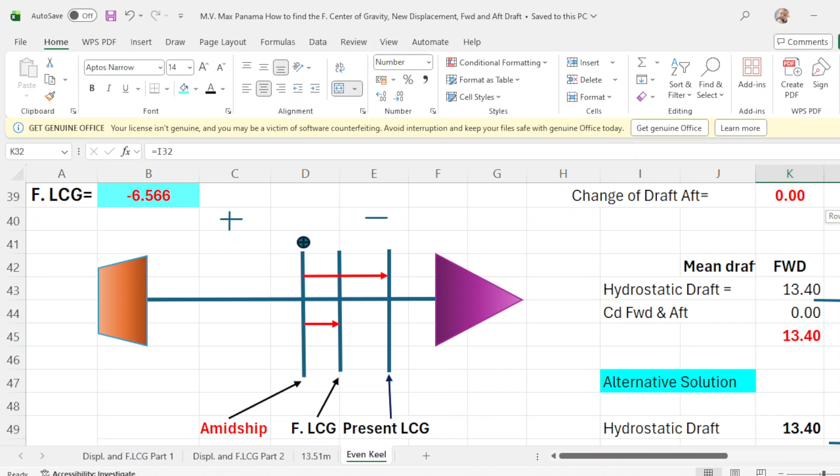So the LCG is forward of midship. When you say negative, it is forward of midship, and number 3 is also forward of midship, and number 5 is aft of midship, and number 7 is aft of midship. When you say aft and forward of midship, this is your midship. Since it is negative, it is forward of your midship. When the sign of the LCG is negative, like this one, it is forward of midship.

But when it is aft of midship, that is positive, which is this one. So positive, that is number 5 and number 7. Number 5 should be around here, and number 7 will be here. Hold number 1 will be here, hold number 3 will be here. So that's why it's negative. And number 5 is positive because it's aft of your midship, and number 7 is somewhere around here, which is also positive. I hope you will take note of the signs.

Okay, so what we do, we use the form like in the trim and stability form. Your initial displacement is 30,582, and its LCG is negative 9.54, which is this one. Hold number 1 is 8,000. The LCG is negative 86.97, in the forward part, that's why it's negative. Number 3 is 10,500, and its LCG is negative 36.560. Number 5, LCG is positive 14.85. And hold number 7, the LCG is 66.32.

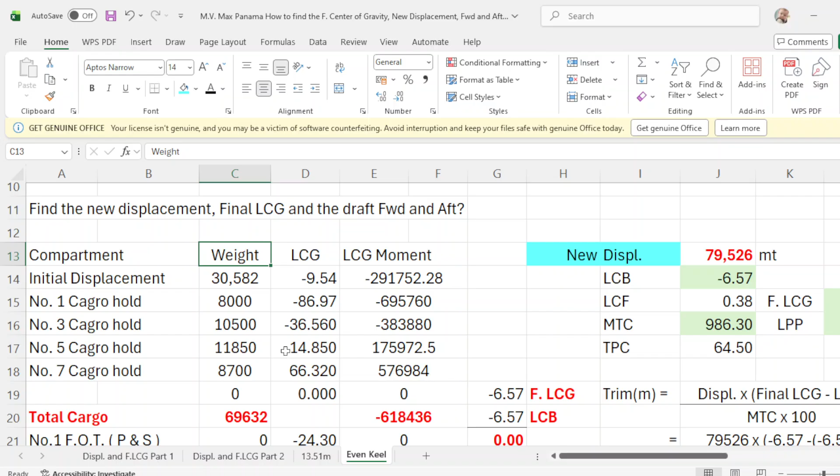Multiply the weight. Okay, this should be the weight. Put it like this. Weight. That is the weight. The weight multiplied with your LCG, that will be this figure. 8,000 multiplied with this figure, that will be this one. 10,500 multiplied with your LCG, and this will be the figure, and so forth. And the total cargo weight will be 69,632, and total LCG moment is negative 618,436. Okay?

Continue. We have no FO, 0. Your DO is 0. Fresh water is 0. And your constant is 280 multiplied by the LCG. This will be your LCG moment. Total deadweight will be 69,912. This is the total moment, so deadweight plus your lightship. This is the LCG. Total displacement or new displacement is 79,526. This is total LCG moment, and your LCG is negative 6.57.

New final LCG. How did I get this one? It is your LCG moment, which is this one, divided by your new displacement, which is this one. So LCG moment is negative 522,166 over new displacement, which is 79,526, and your final LCG is negative 6.56. Take note of this displacement, 79,526.

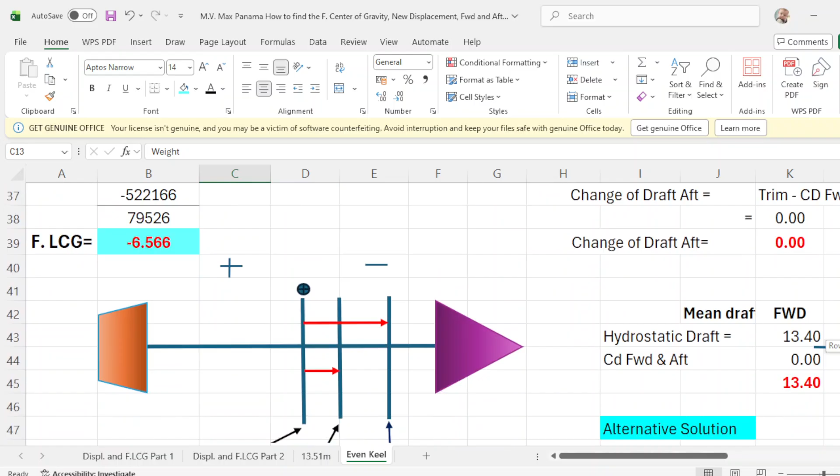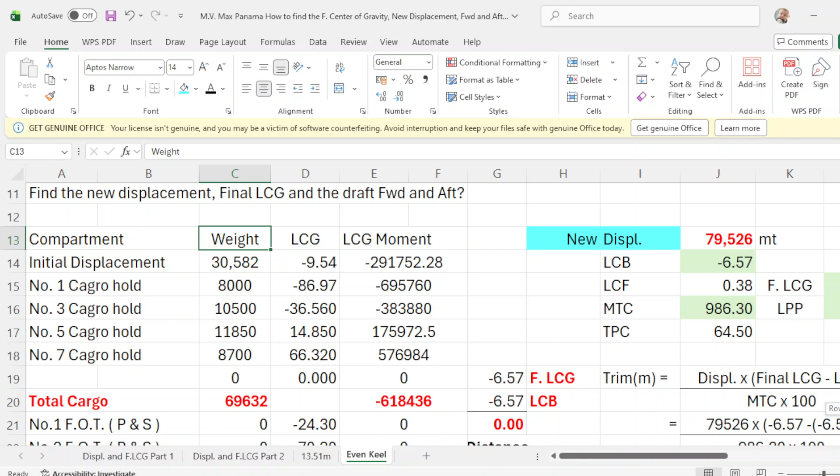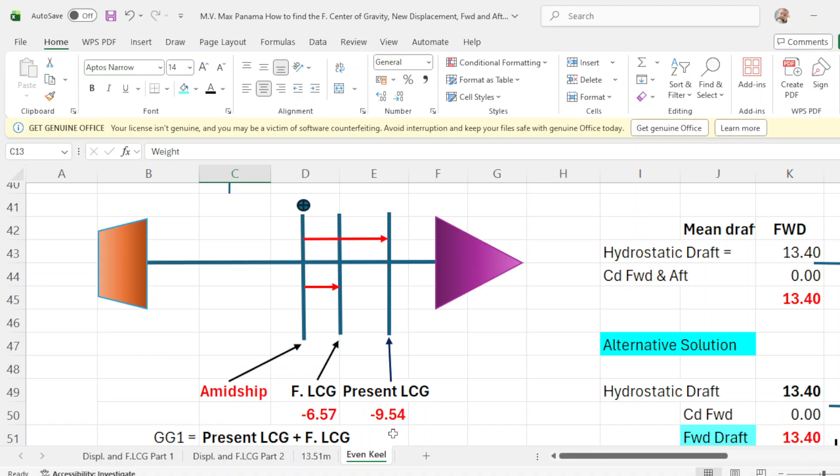Okay, before we get that, your present LCG is negative 9.54, which is this one, because this is your initial 30,582, and your initial LCG is negative 9.54. So from midship, you measure 9.54. This will be the vertical line of your present LCG.

Now your final LCG is negative 6.57. That will be this vertical line from midship going to 6.57. This will be your final LCG. This is your midship. And the distance between present LCG to final LCG is 2.97. That is what you call GG1. So from initial G to G1, that will be 2.97.

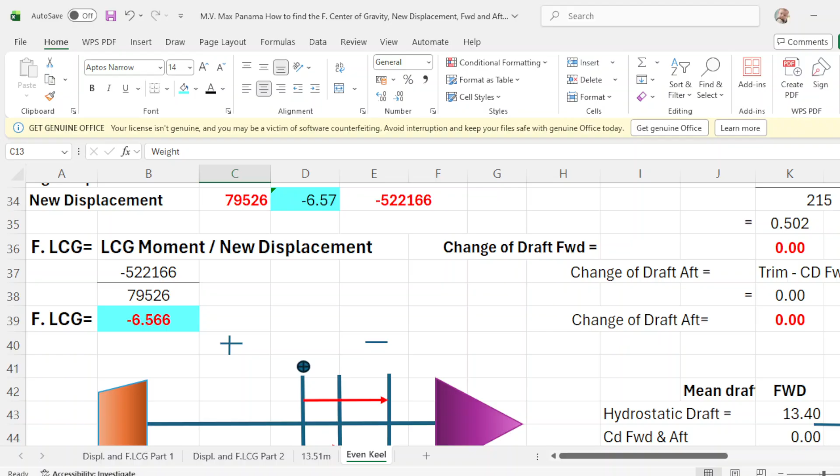Now, take note of this displacement of 79,526. So 79,526 is 13.40. We'll check. Put here 79,526. That will be 13.4.

13.4 meters. What will be its LCB? LCB is negative 6.57. LCF is 0.38. MTC is 986.3. And your TPC is 64.5.

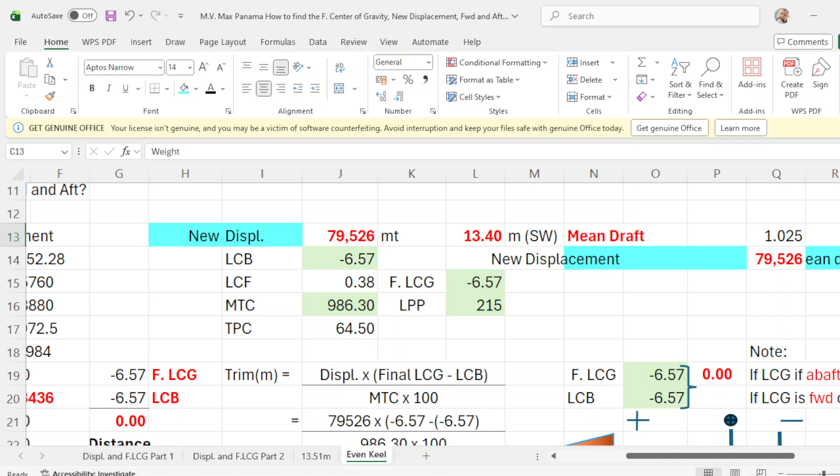TPC is 64.5. And your final LCG is 6.57, which is this one. And your LBP is 215. How do you get 215?

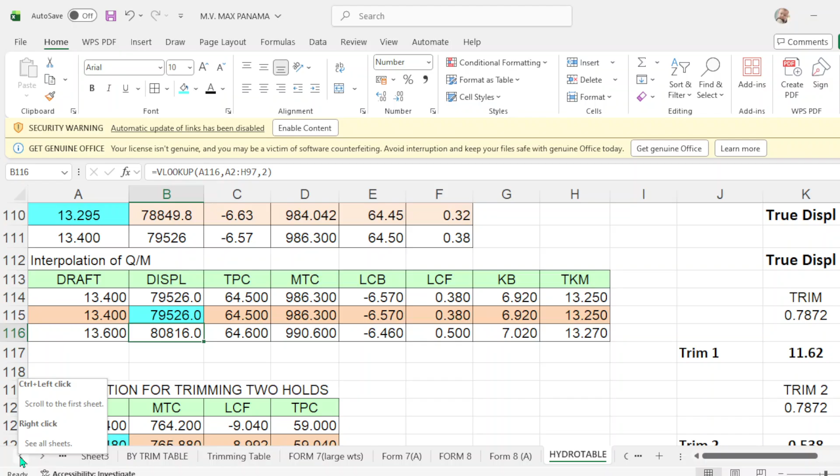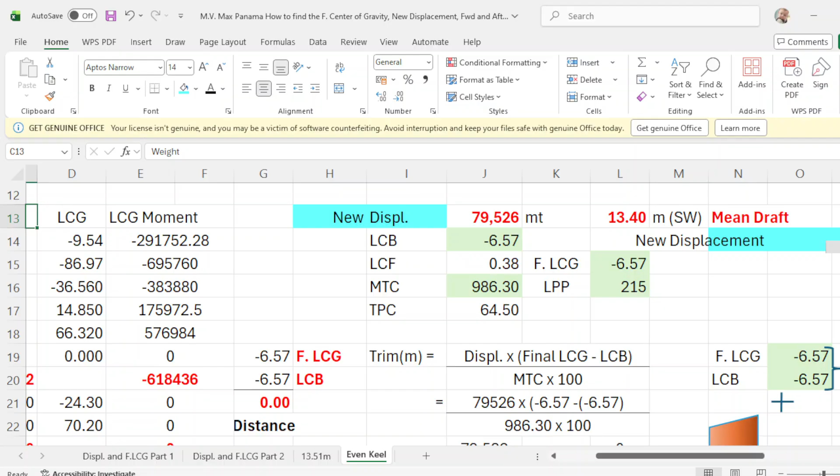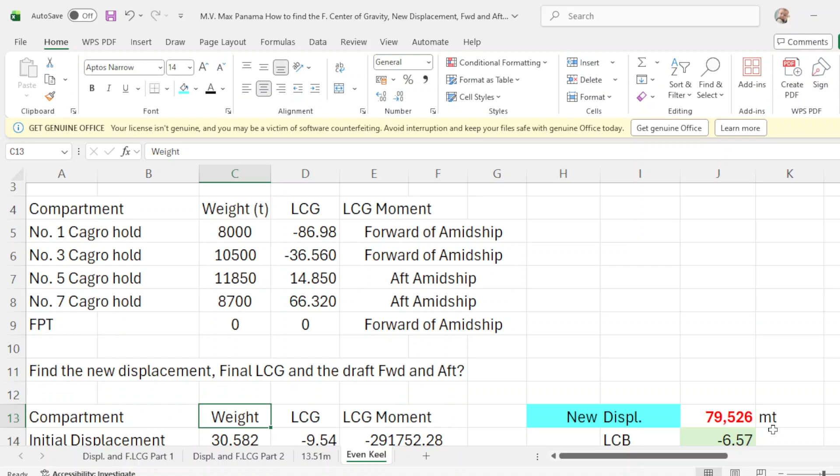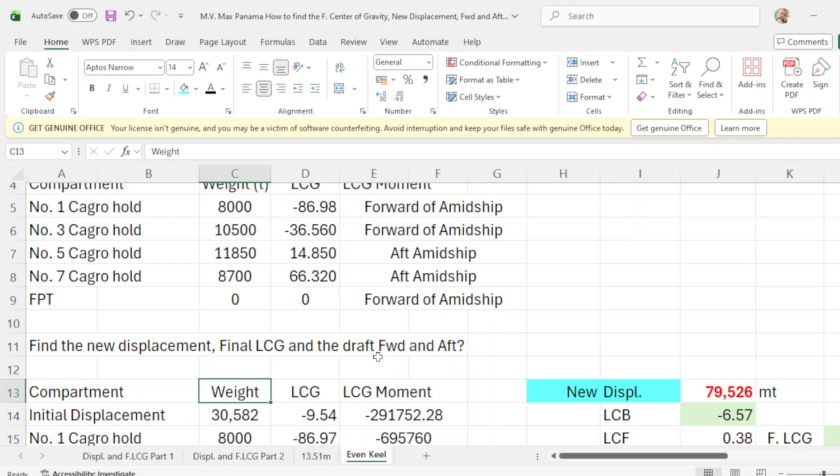LPP is 215, so 15. Since we already have the mean draft, we are now going to compute for the forward draft and aft draft. The new displacement is now 79526 and the final LCG is negative 6.57. The next will be to find for the forward and aft draft.

First, we have to get the trim. The formula for getting the trim is displacement times final LCG minus LCB. So our displacement is 79526. Our final LCG is negative 6.57 minus, LCB is negative 6.57. Take note that the final LCG and final LCB are the same, that's why it is 0.

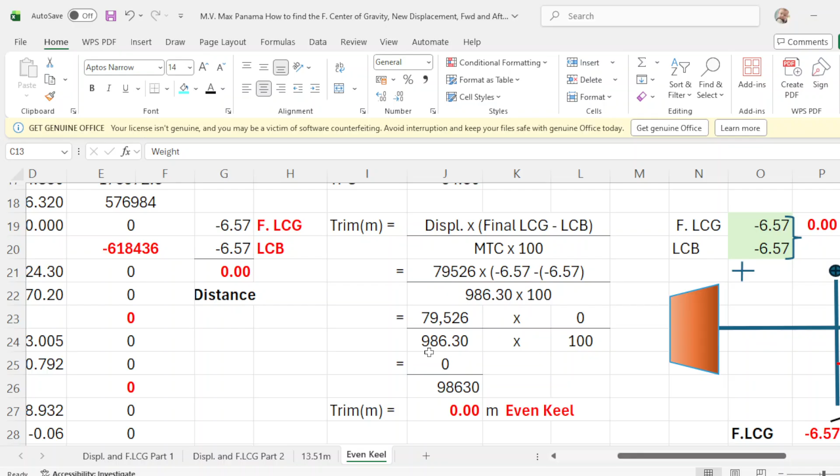And your MTC is 986.3 times 100. So: 6.57 final LCG minus your LCB is 0, and your displacement is 79526, and your MTC is 986.3 times 100, according to the formula. Multiply this one, that will be 0. Multiply 986.3 times 100, that will be this one. You divide this one, then your trim will be 0.

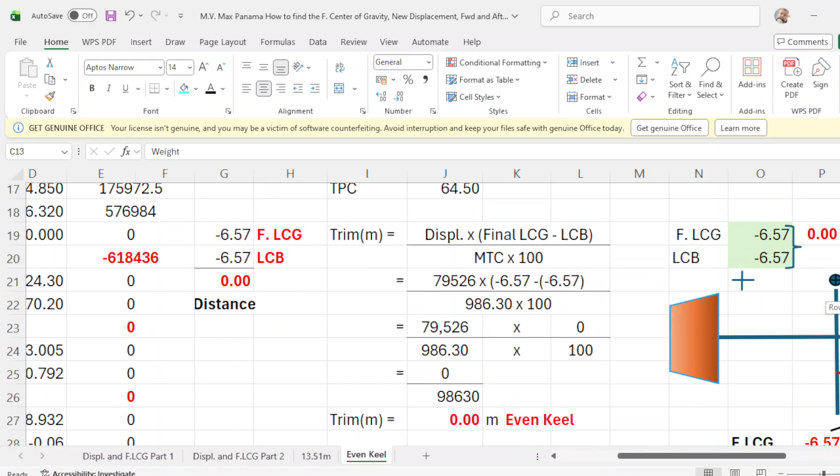Meaning even keel. Why even keel? Because your final LCG is the same as the LCB. Now how am I going to prove it? Take note of this: on an even vessel or even keel, the role of the longitudinal center of gravity (LCG) and the longitudinal center of buoyancy (LCB) is that they must be in a vertical line.

So your LCG, center of gravity, and your center of buoyancy or LCB should be in a vertical line. That's why it is even keel. So your final LCG and your LCB, if they are in a vertical line, that means they are even keel. So by equation, this is how it looks like. That's why your distance is 0. That's why it's even keel, the trim is 0 because it is even keel.

Now, from getting the trim, we will compute for the change of draft forward. The formula is 1/2 LPP plus LCF over LPP. Your LPP is 215. 1/2 of LPP is 107.5, and LCF is 0.38.

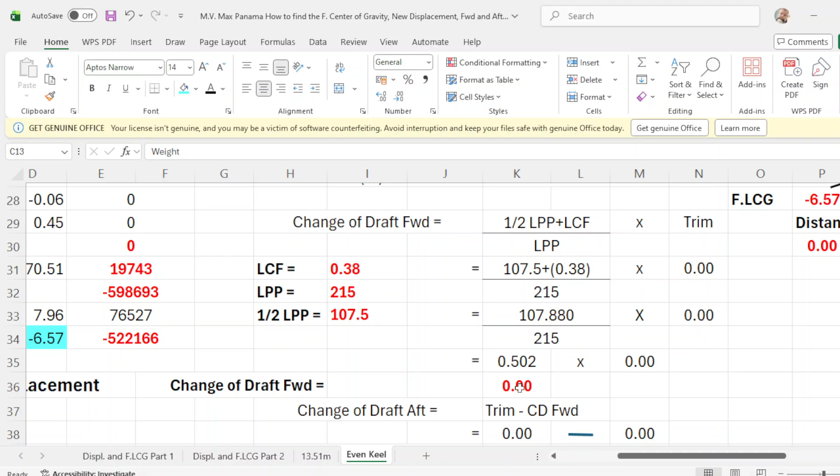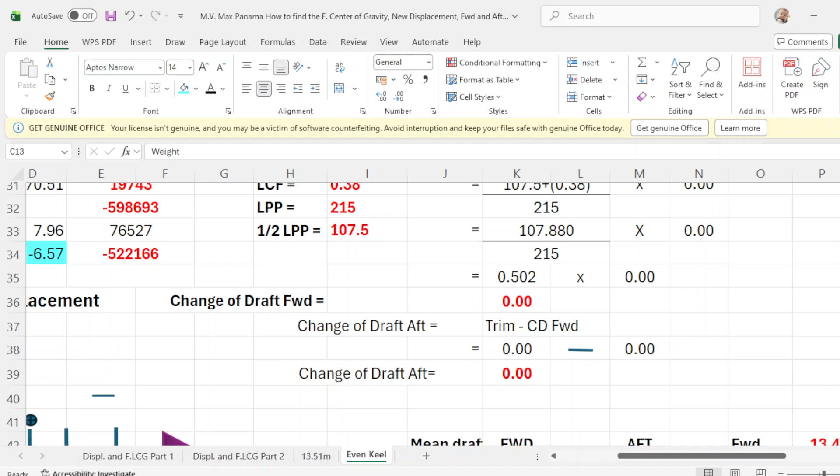So to get the change of draft aft, it is trim minus change of draft forward. Your trim is 0, change of draft forward is 0, then change of draft aft is 0. Then we go to this equation now.

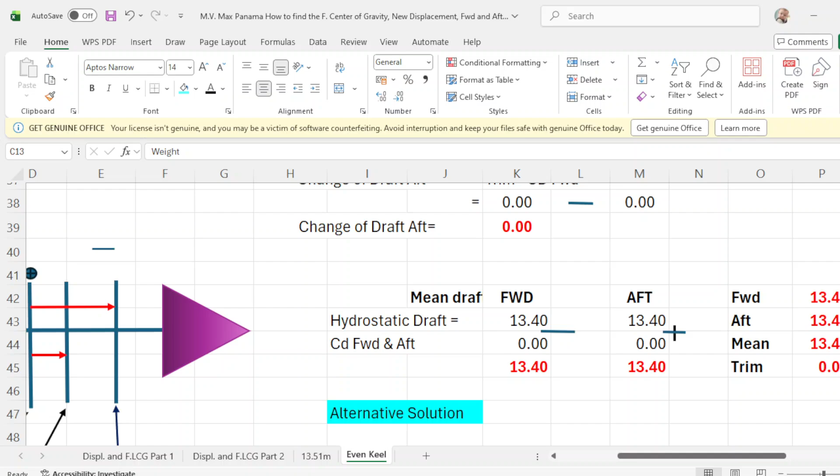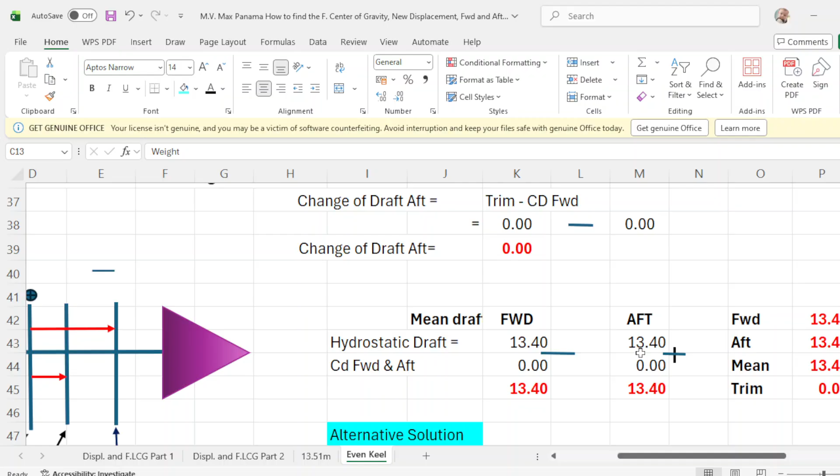By hydrostatic table, your mean draft is 13.40, which is this one. With your new displacement, the mean draft is 13.40 of salt water. That will be forward and aft. Since your change of draft forward is 0...

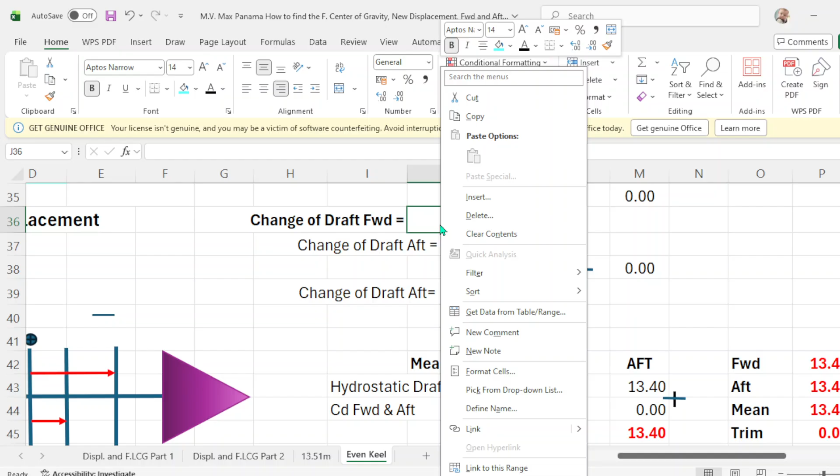Cut this one here, paste... okay, cut... paste. So your change of draft forward is 0 here, and your change of draft aft is 0.

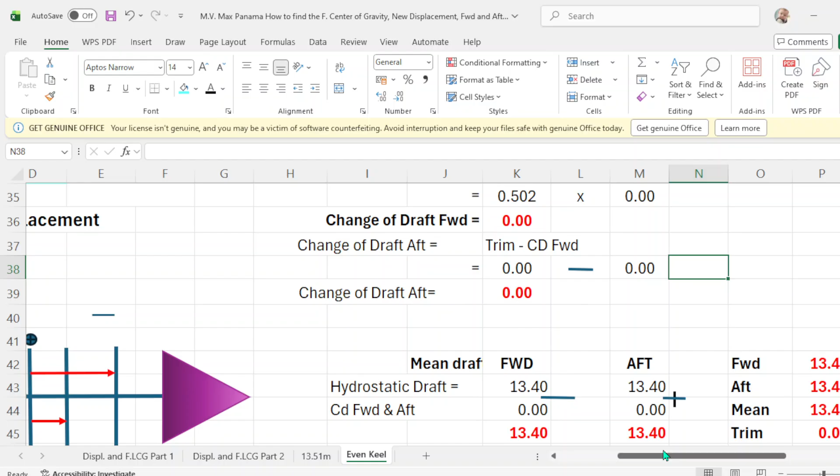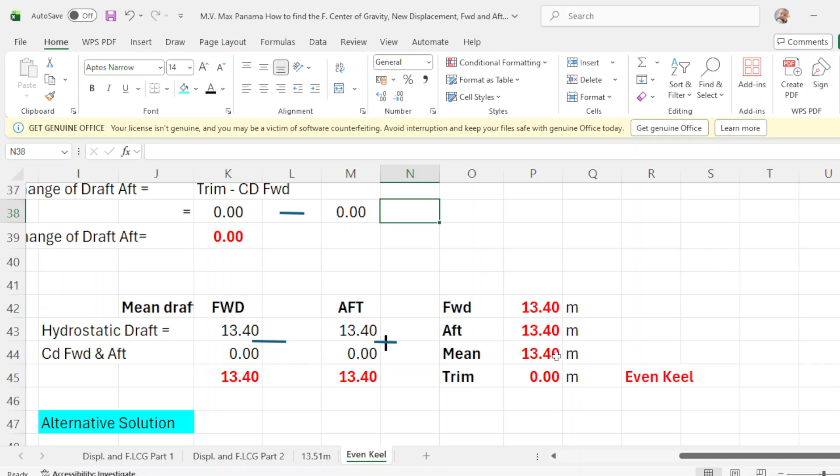So your final draft forward is 13.40 and aft draft is 13.40. So your mean is 13.40, your trim is 0. Now there's another solution: your mean draft is 13.40 minus your change of draft forward, which is 0, then your forward draft is 13.40; plus your trim, which is 0, then your aft draft is 13.40.

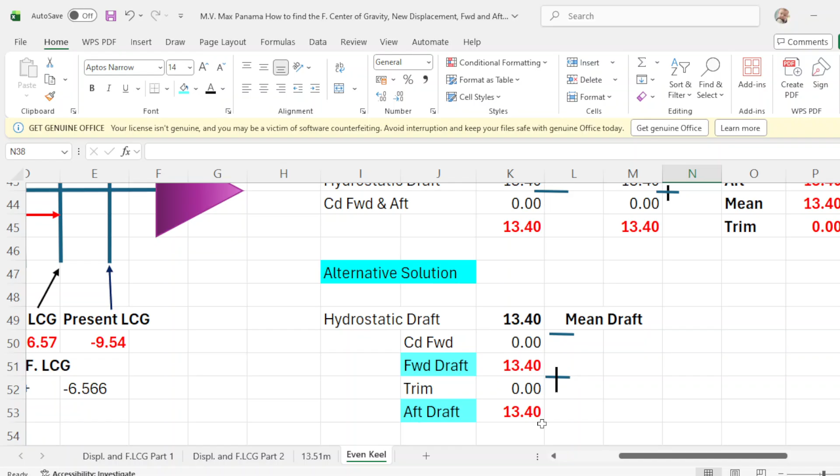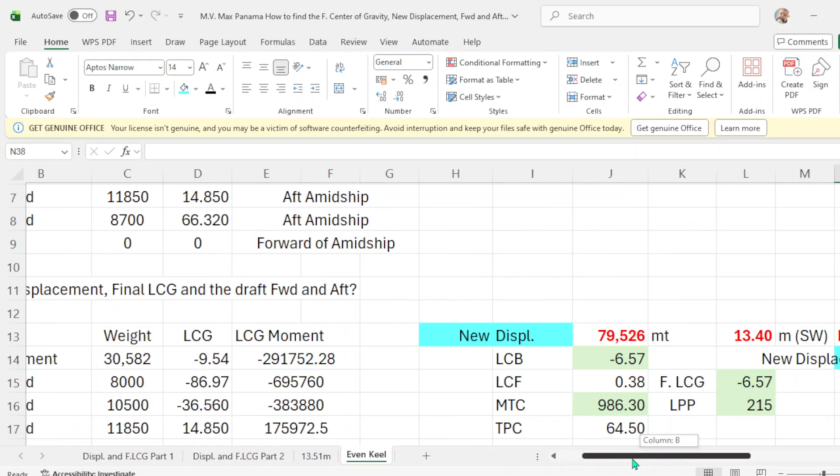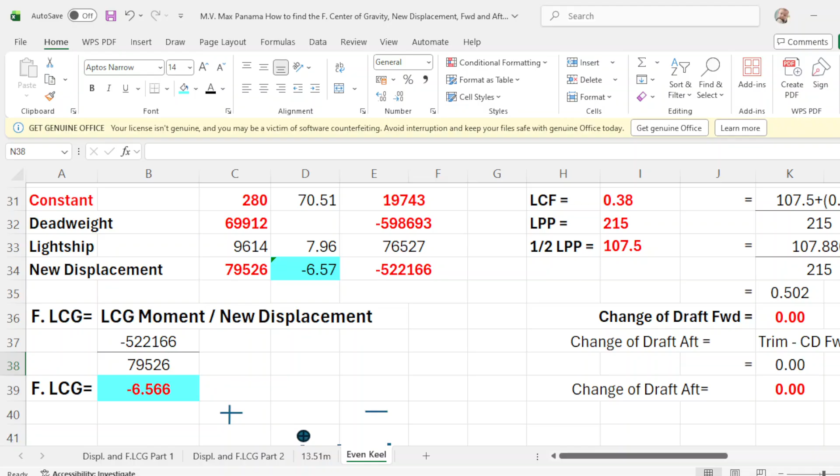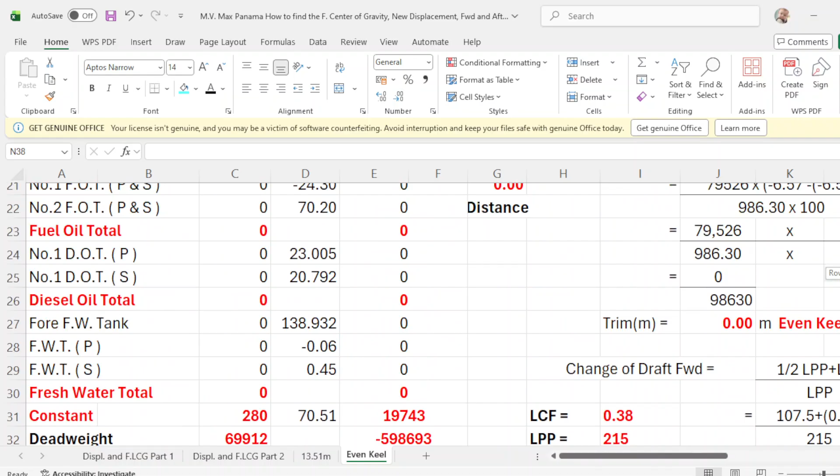Now we have already answered the question of the new displacement, which is this one: new displacement of 79526, with a draft of 13.40, and the final LCG is this one, negative 6.57 or negative 6.566. We have already the final LCG, and the forward and aft draft is even keel at 13.40.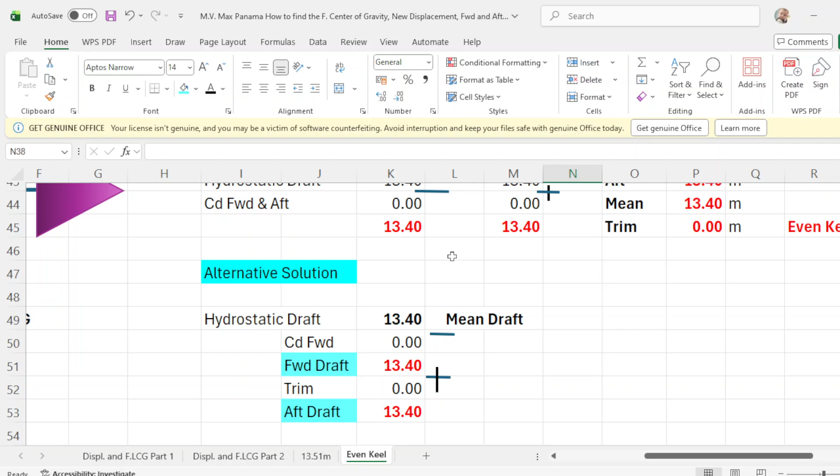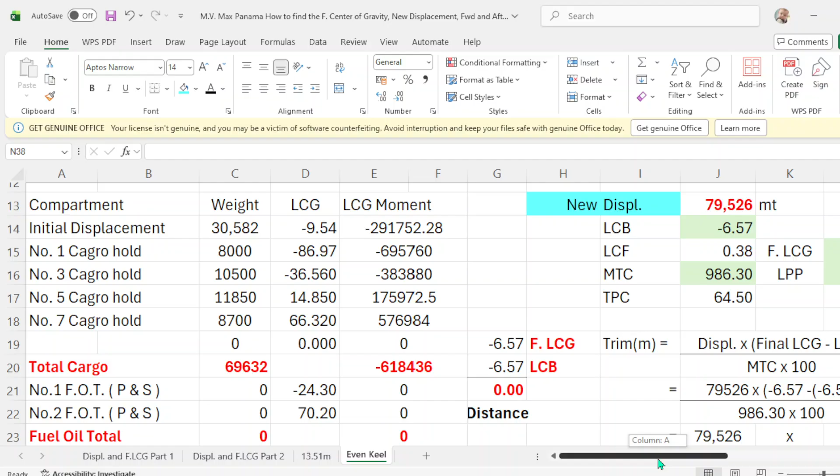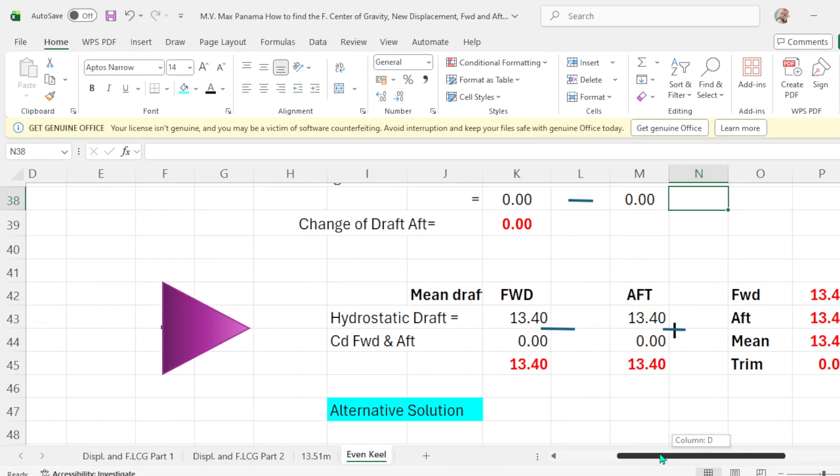So this is the equation or solution when you load in cargo holds 1, 3, 5, and 7, with your initial displacement of 30,582, and the LCG is negative 9.54. But I have another equation or formula to prove that we can come up to this final draft of 13.40, even keel, forward and aft. So I'll show you guys the other process, which is this one.

This is form number 6: how to find trim when handling several moderate weights. Your initial draft is 5.48, which is this one.

Okay, 5.48 even keel. So you put here 5.48. Okay, so you put here 5.48 forward, aft is 5.48. And your mean will be 5.48.

So you will take your actual draft, mid port, that will be, for example, 5.48. And your starboard mid is also 5.48. Okay.

So your mean draft, actual mid draft is 5.48. And your final draft is 13.40. Okay, so you put here 13.40. Okay, when you press this one, your sinkage will be 7.92. The vessel has to sink about 7 meters and 92 centimeters to reach 13.40.

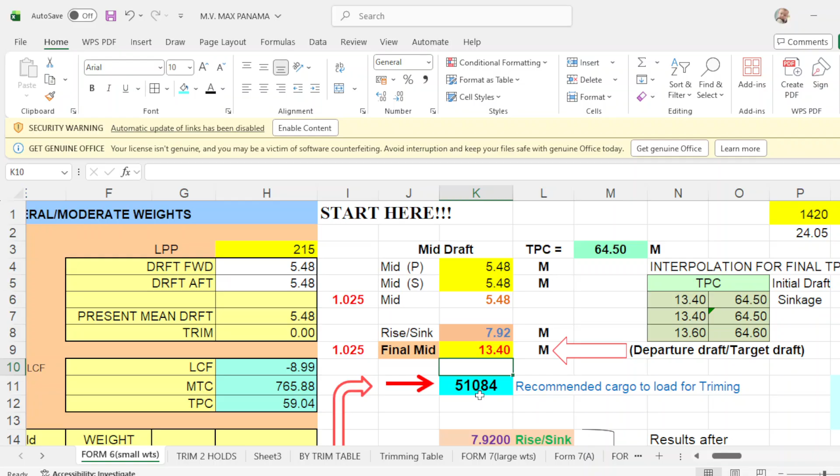Now the recommended cargo to load is 51,084. Now what happens if you load this amount? So you put here 51084. That is the cargo that you're going to load in your vessel, total cargo.

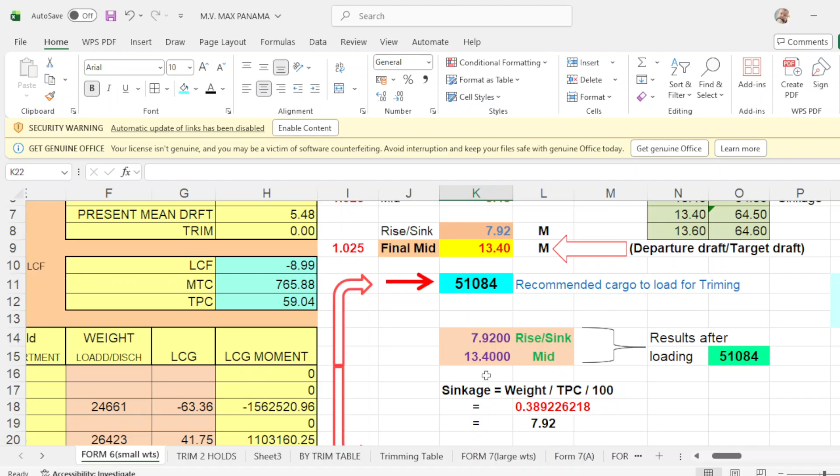So when you load, what happens if you load 51084? Your mid draft is exactly the same with your final mid draft, and your sinkage is exactly the same with your sinkage of 7.92. So it is confirmed that with this figure, you are going to reach this 13.40, your final draft.

Okay, now we go to trim holds 2. So we go to trim holds 2. Now, guys, I want you to take note that the remaining program is trimming with 2 holds. And the remaining cargo to load is 51084, which is the same, 51084.

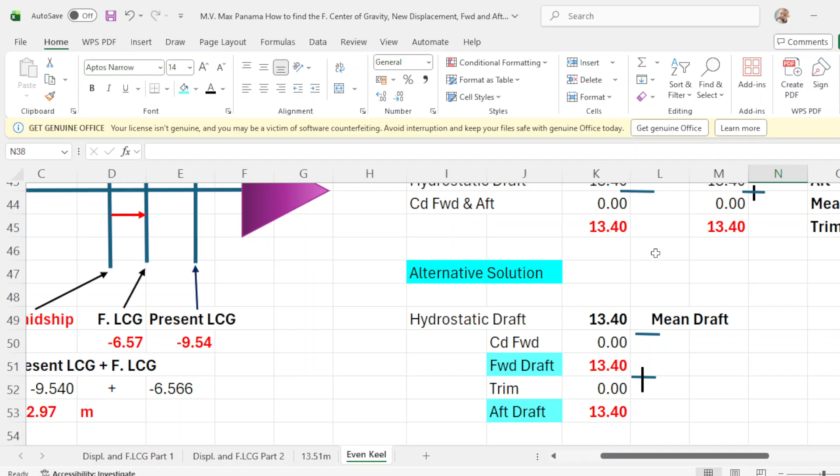But in this case, guys, you are trimming 2 holds. So I trim for 2 and 6. But in the program, in the other one, you're going to load in 1, 3, 5, 7. Okay, but in this case, we're just going to prove if we load in 2 and number 6, we will still get the final draft of 13.40 even keel. Okay, so this time, let's say we're going to load in 2 and number 6 hold with the same cargo. Okay, so I put here 2 and I put here 6.

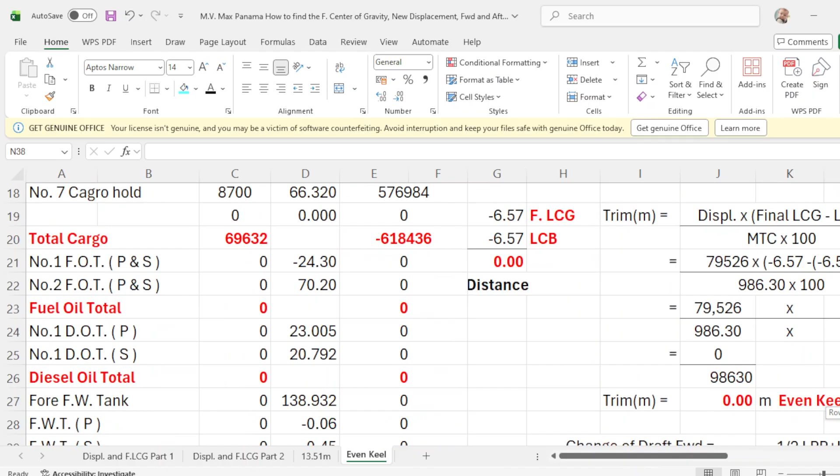Okay, instead of using one, two, three, four holds, I'm going to use here only 2 holds. This is just to prove that you will get the departure draft of 13.40.

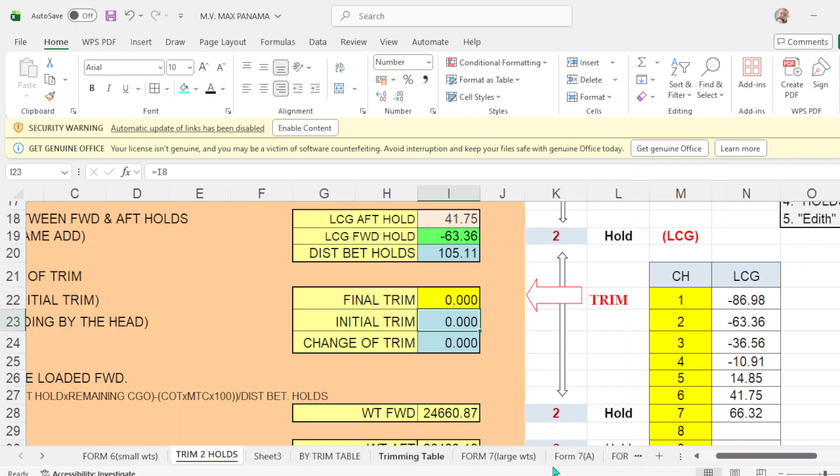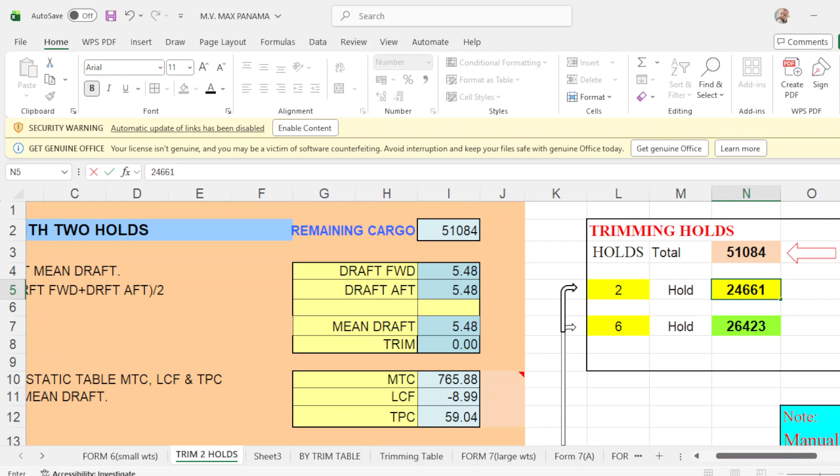Okay, you get your 2 and 6, and let's say even keel, no trim, and the recommended cargo to load for number 2 is 24661. Okay, 24661, so I put here 24661, and number 6 will be 26423.

26423. Okay, and your final draft would be 13.40 forward, and aft draft is 13.40 aft, 0 trim, and your mean is 13.40. And here your deflection is 0. Okay, your bending moments and shearing force, or deflection, is 0 here.

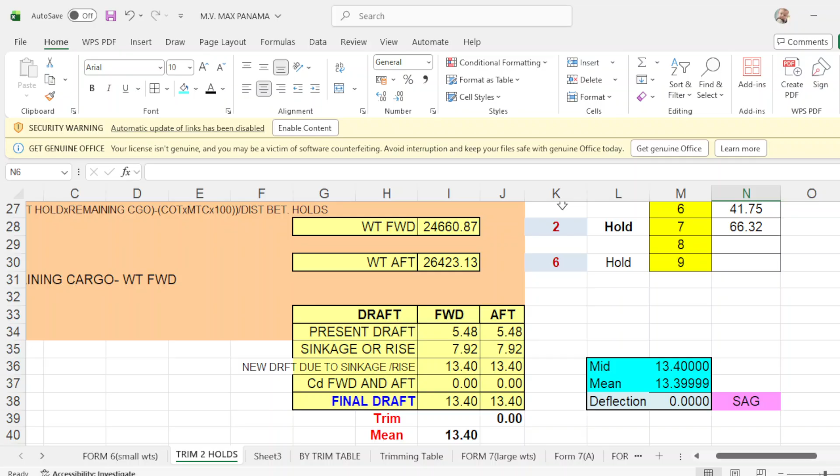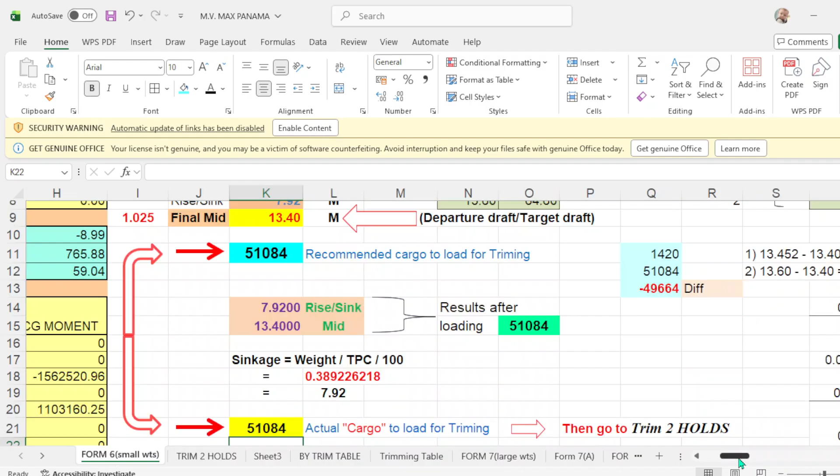Okay, so let's go back to this, so this is another program, guys, of trimming with 2 holds. Then we go to form number 6 from the start, which is how to find trim when handling several moderate weights.

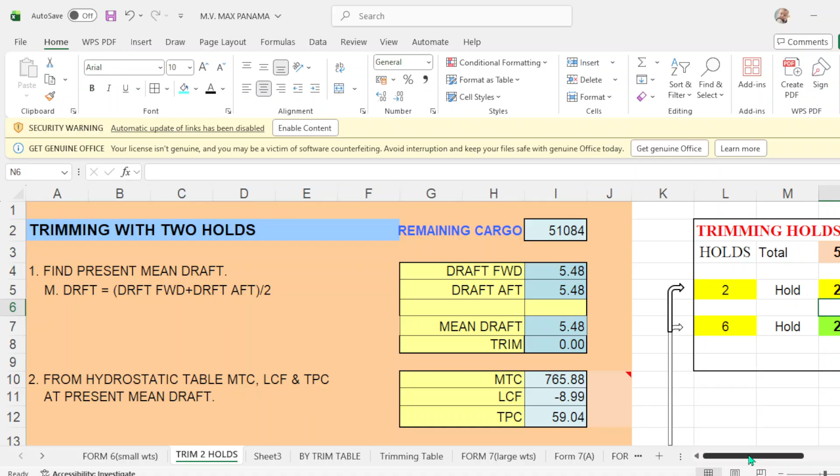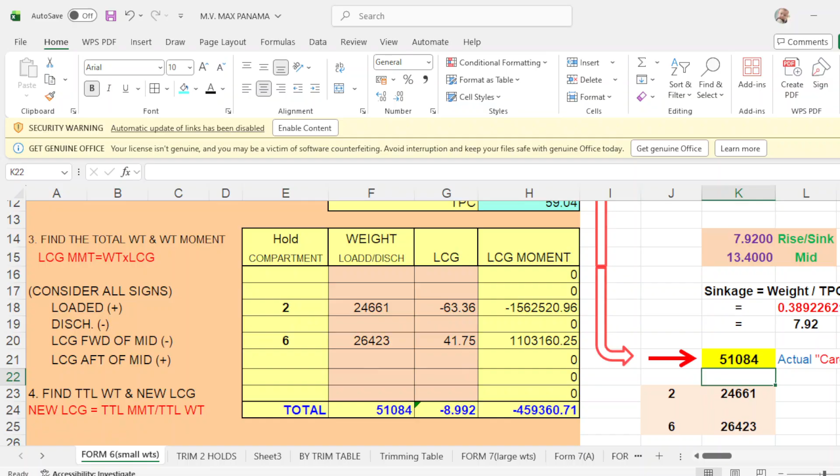Okay, since you recommended, as recommended in hold number 2 is 24661 according to this figure here, and number 6 is 26423. So in number 2 you put here 24661, you have your LCG, and number 6 is 26423, you have your LCG, and your final draft would be forward is 13.40, aft draft is 13.40, you have 0 trim, and your mean draft is 13.40, and you have here deflection is 0.

Okay, this is the second program, and your last program to prove that you still have the same figures. So take note, the recommended cargo to load is 51084, which is 51084. Okay, and your initial draft forward is 5.48, aft draft is 5.48, which is this one.

Okay, and your trimming, go to your trimming table for your correction. So if you're in hold number 2, your forward and aft correction, that will be forward is 4.8, aft is negative 1.7. This one, guys, we just choose 13 meters because 13.4 is close to 13 meters.

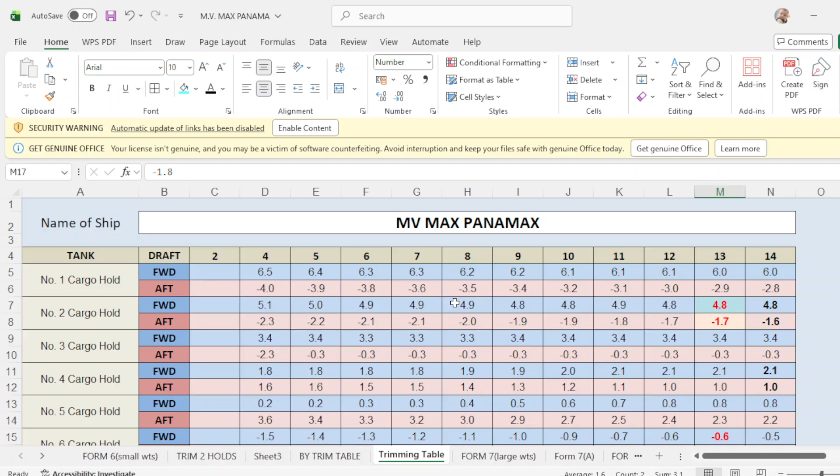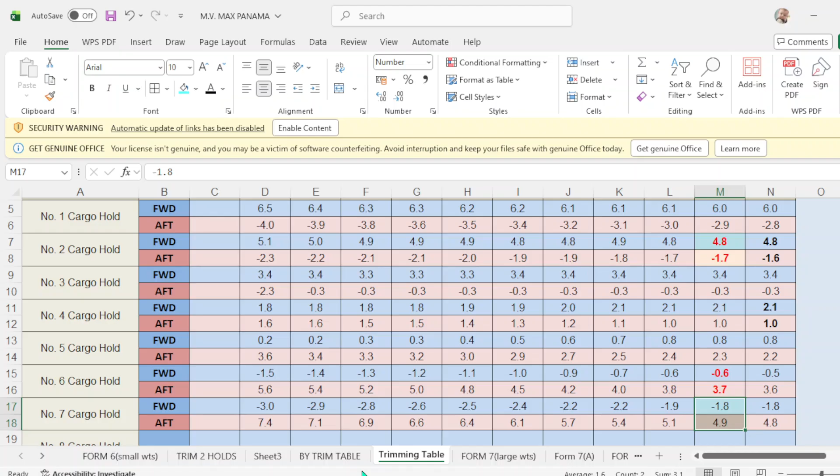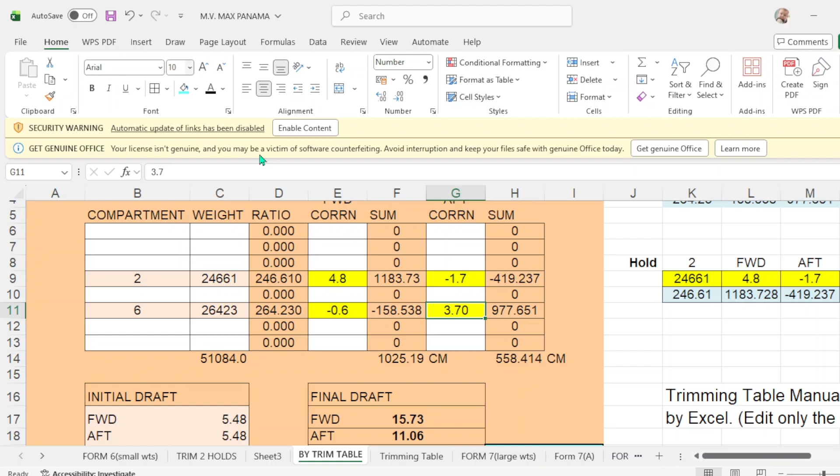Take note when I adjust the correction on number 6 from 3.7 to 4.58, take note that the draft aft is 13.4. So I will also adjust this one. Then adjust this one forward. No, it's 13.4. Again, I'll go back.

From 4.8, I will adjust it to 3.9. Now I will have an even keel of 13.40. See? And zero trim, the deflection is 0.

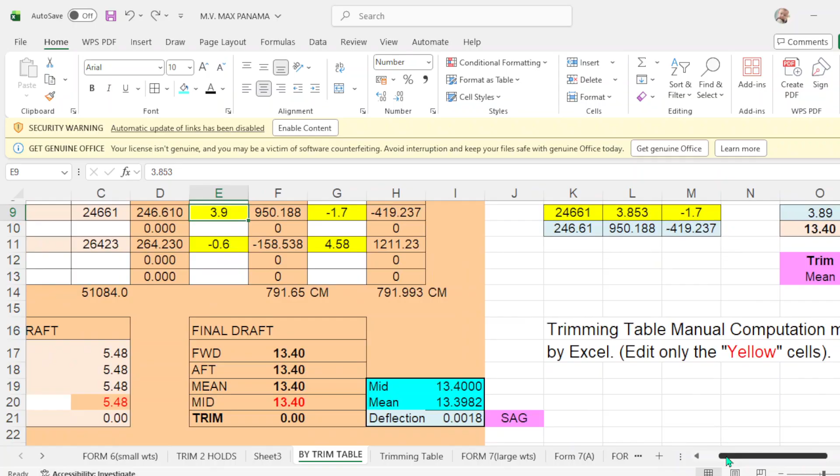Now, for example, the correction in number 6. To load in number 6, because you want to have a trim, first you load in number 6, the cargo to load is 26423, the correction forward is negative 0.6, and aft is 4.584, and number 2 is 24661, forward correction.

Number 2 is 39 or 3.853, and aft is negative 1.7.

Now, after loading, this is your initial draft. After loading this figure, your initial draft will be 3.89 and aft will be 17.59. The big trim.

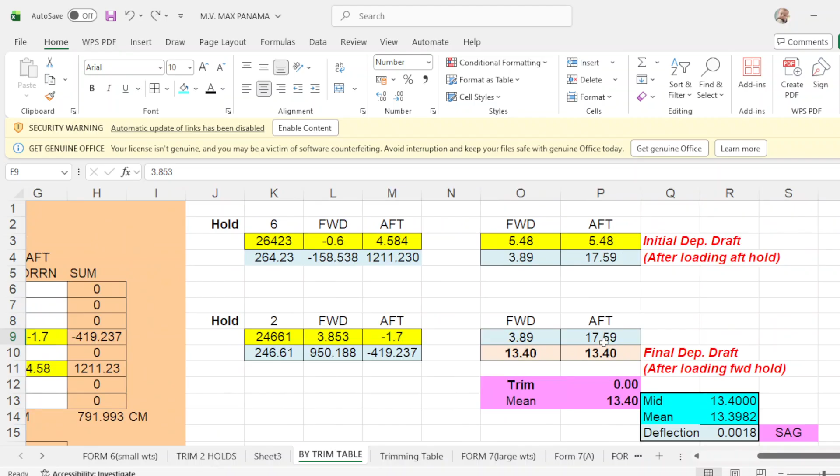Then you load in number 2. After loading this figure, then you will have even keel. Your trim is 0 and your mean draft is 13.40. Guys, you don't actually have a trim this big. This is just to show, to prove to you that the final draft we can reach is 13.40.

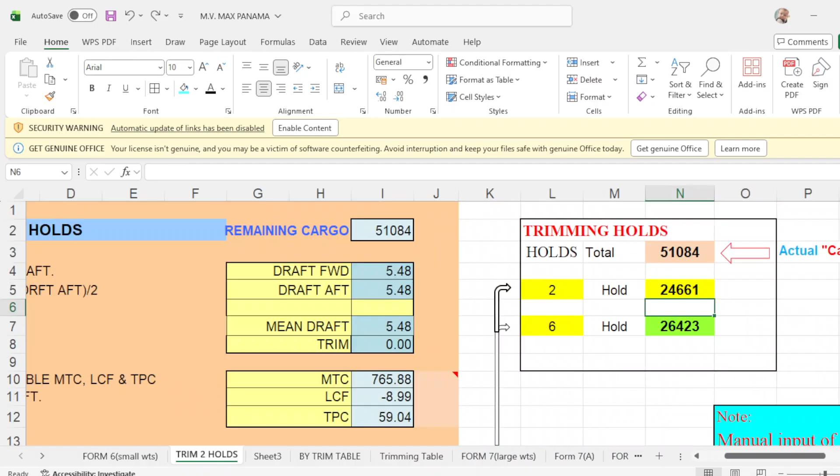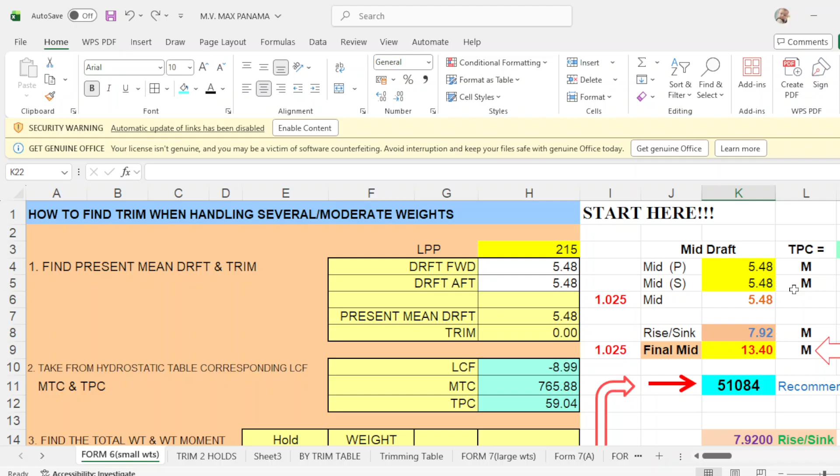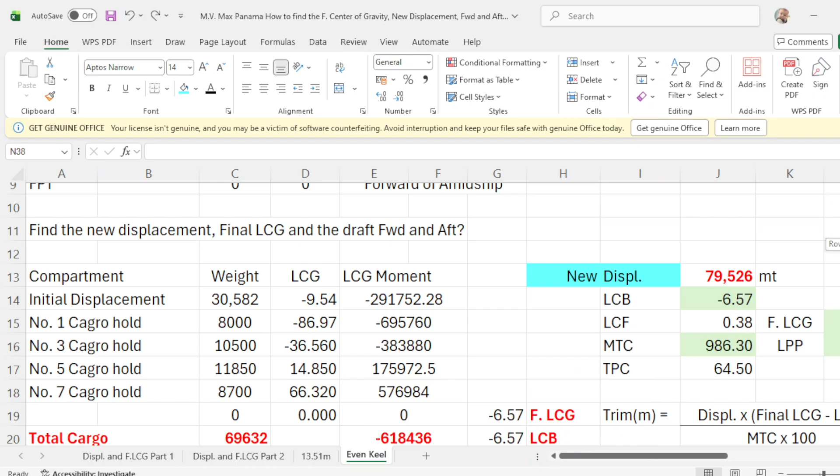With this one, with this figure, okay, you will reach the final draft of 13.40, and here 13.0, okay. But the original is when you load 1357, this amount of cargo, you will arrive at the draft of even keel, okay, of 13.40.

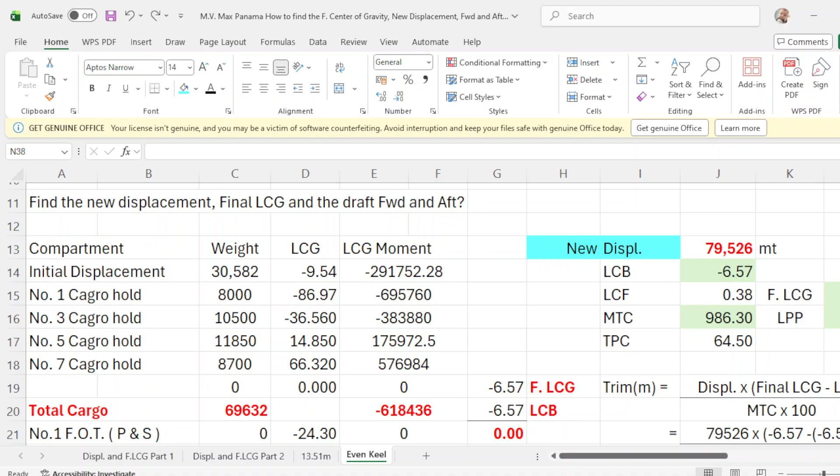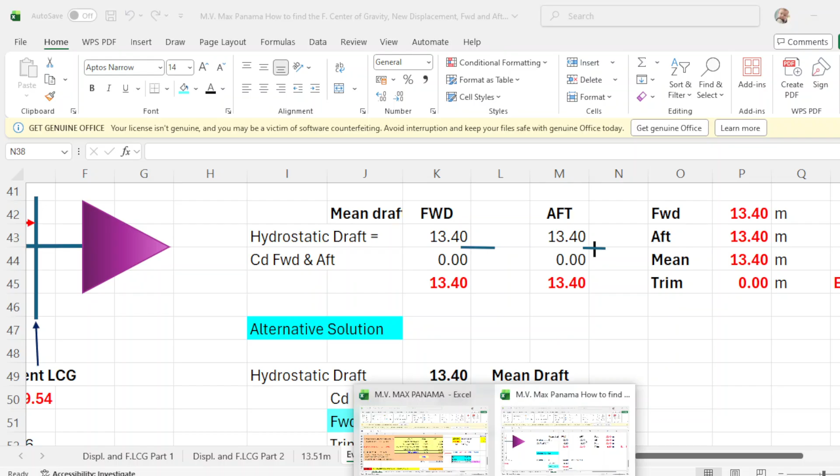So if you load these figures, 1357 with your initial displacement of 30,582 with a draft of 5.48, you will get even keel of 13.40, okay. These figures I show you only prove that you can reach the draft of 13.40. This is impossible if you load 24,000 and 26,000.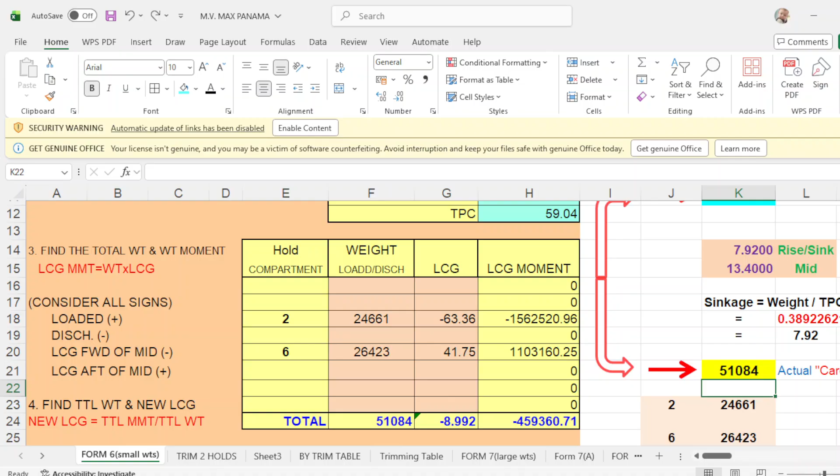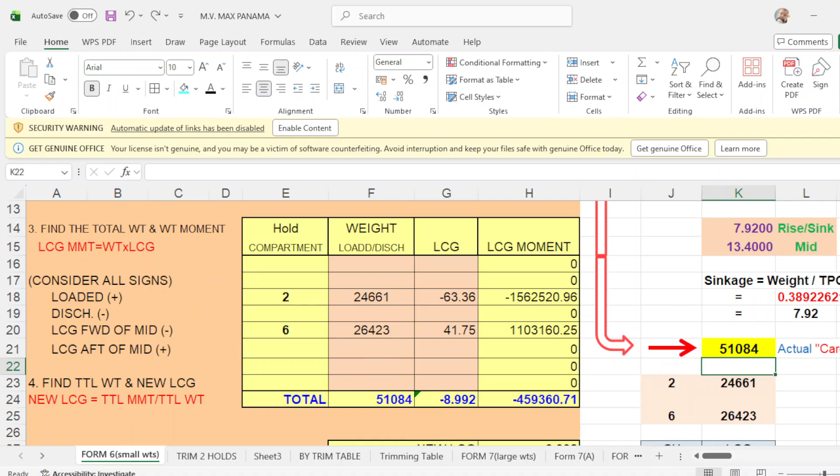Well, probably you can load this one at the same time. You load number 2 and number 6 at the same time together, then you will reach the final draft of 13.40. But never attempt to load in number 2 alone. Continue loading this one, then you will load number 6, because you will have a big trim. Take note of the big trim, guys.

Where is that? Trim, this one. This is impossible, guys, because look at that. The trim is 14 meters. That's impossible. Then you will load number 2 of this amount, then you will...

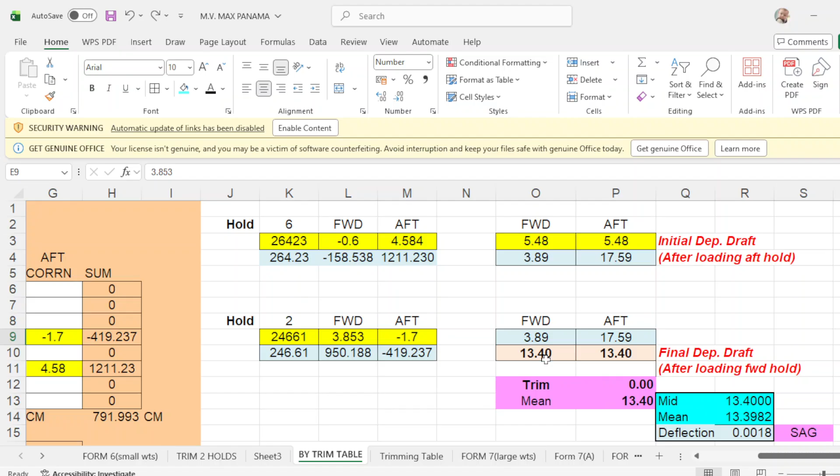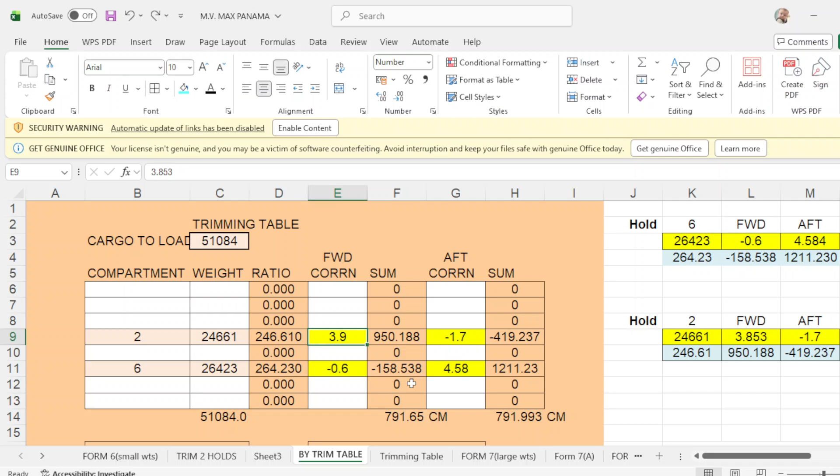The best thing to do is load number 2 and number 6 at the same time together so that you will come out with a draft of 13.40. Okay, this is just to prove that it's possible that we can reach 13.40 with this program.

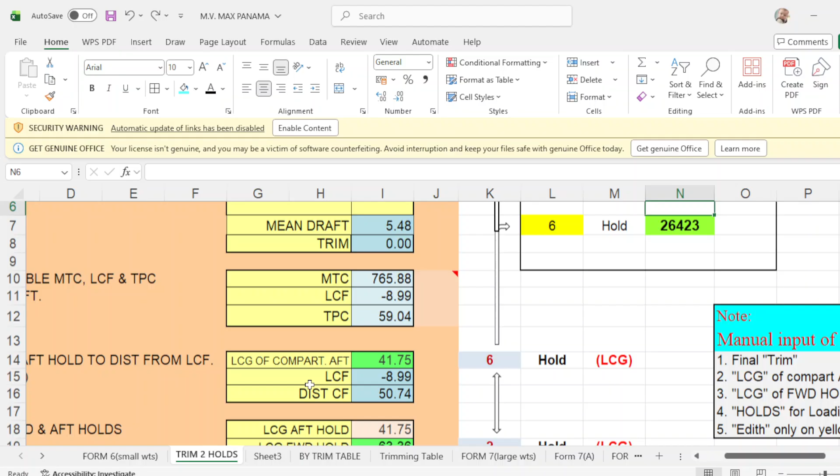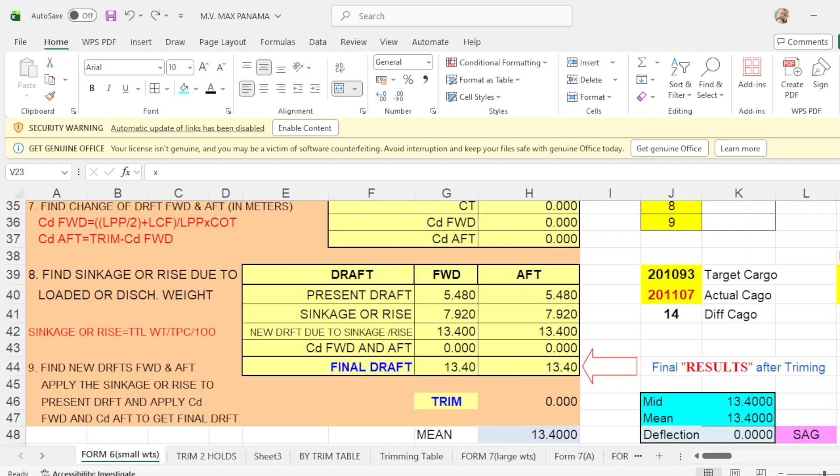We have here, I'm sorry, this is form 6, even keel 13.4, trim 2 holds 13.4 even keel, and by trim table we have 13.4 even keel. By manual computation you can do this one.

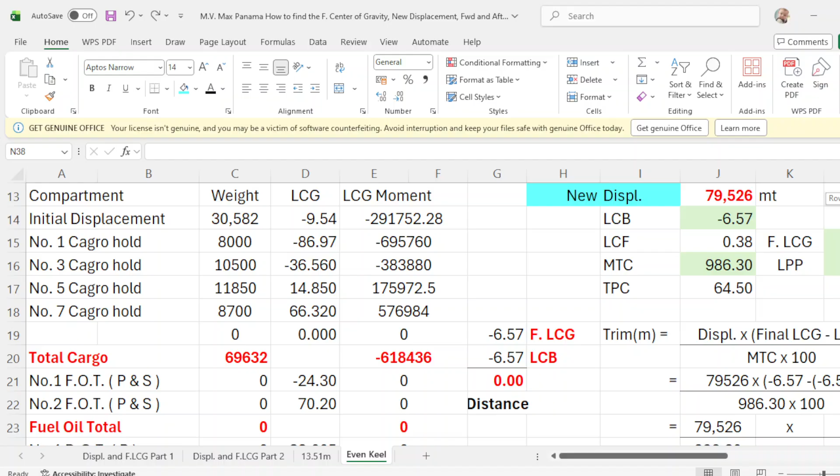And this is the same as your trim stability sheet.

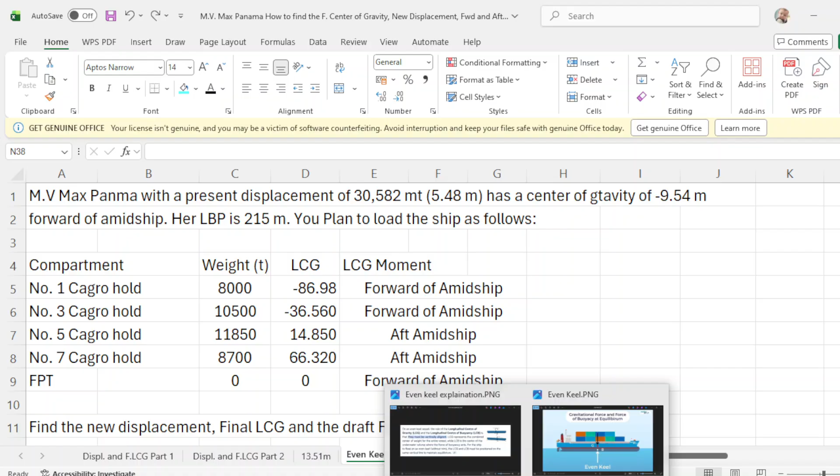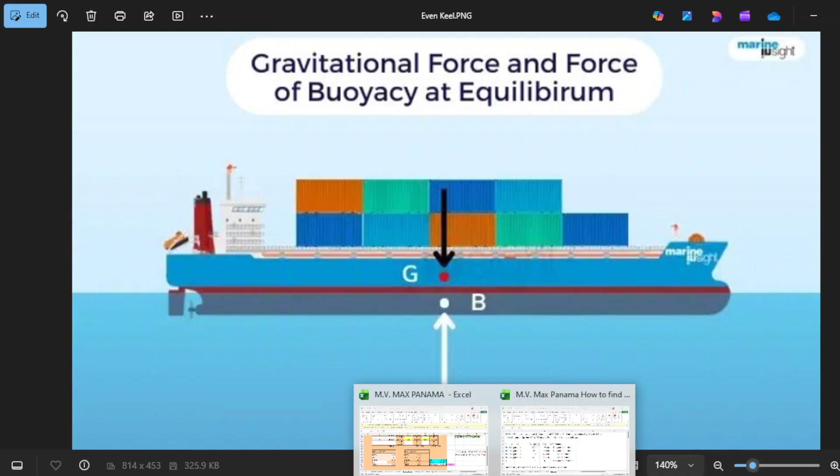So that's it, guys. By the way, I've already shown you this one and this one. When even keel, your vertical LCG and your LCB would be in a vertical line, in the same line, then you will have even keel, as shown in this figure.

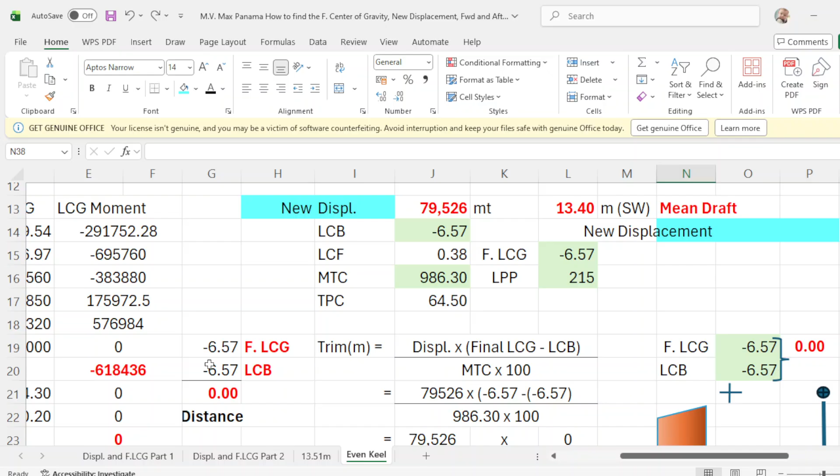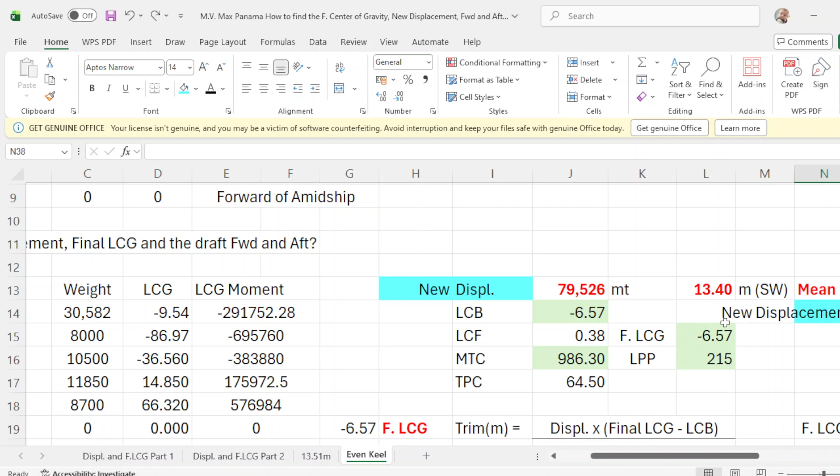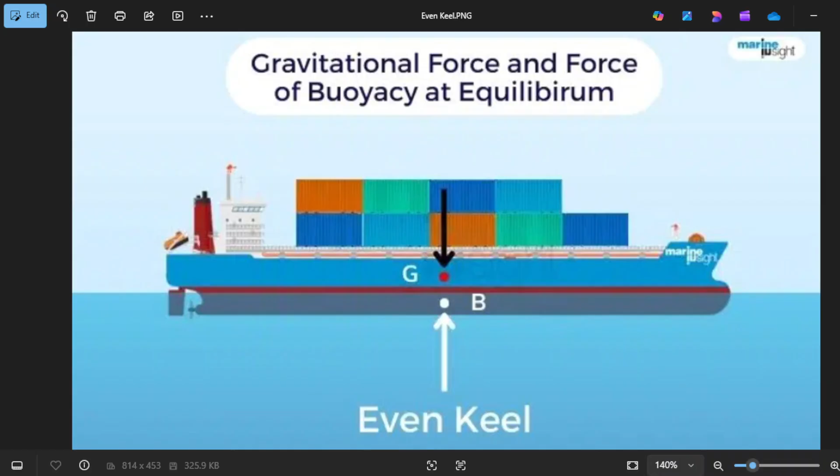Your LCG, final LCG is negative 6.57, which is this one, negative 6.57, that's your final LCG, and your LCB is negative 6.57, which is this one, with the draft of 13.40 and the displacement of 79526. So they are the same in a vertical line, as according to this figure and explanation.